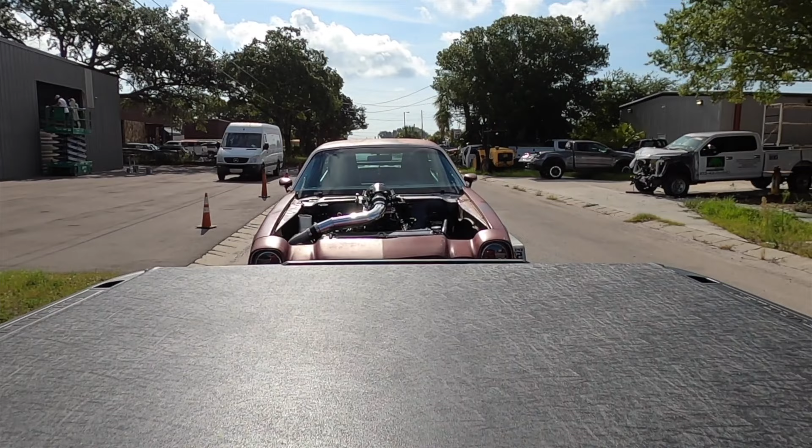Alright guys, got the Camaro back on the dyno, getting it cooled down now. Intercooler is nice and cooled, and got the dyno already calibrated. So we're gonna go by gear ratio for speed. Be ready for a rip here in a second.

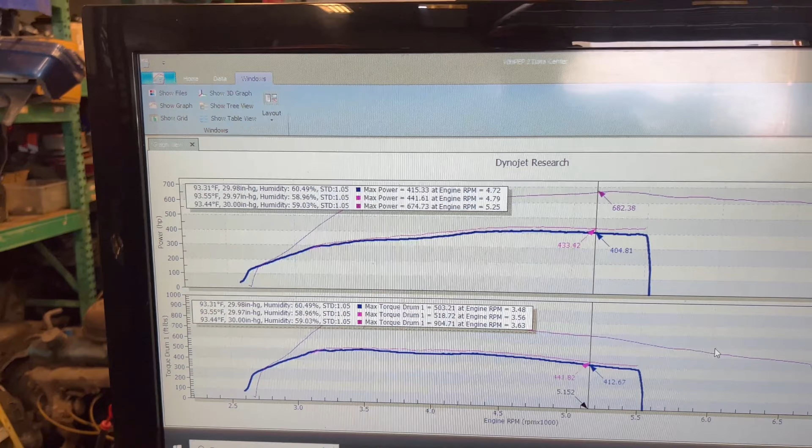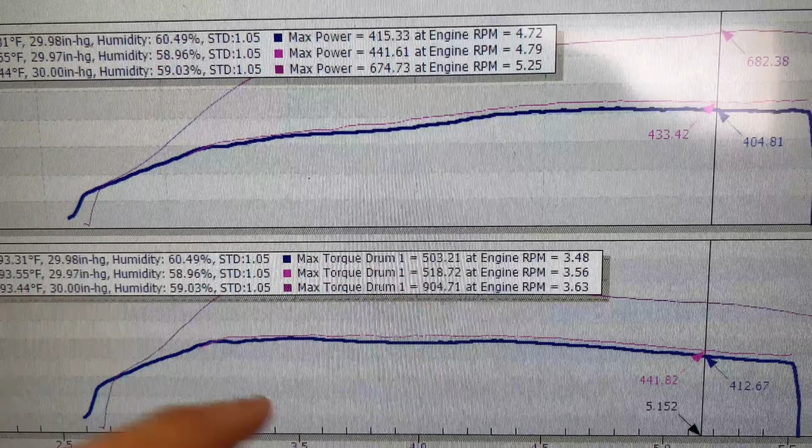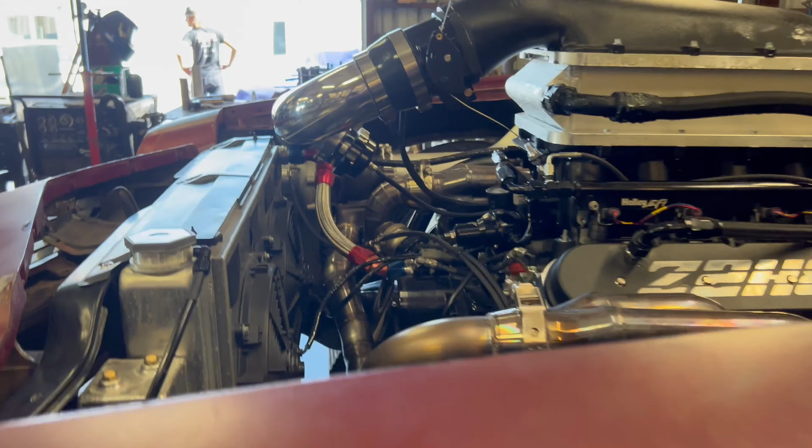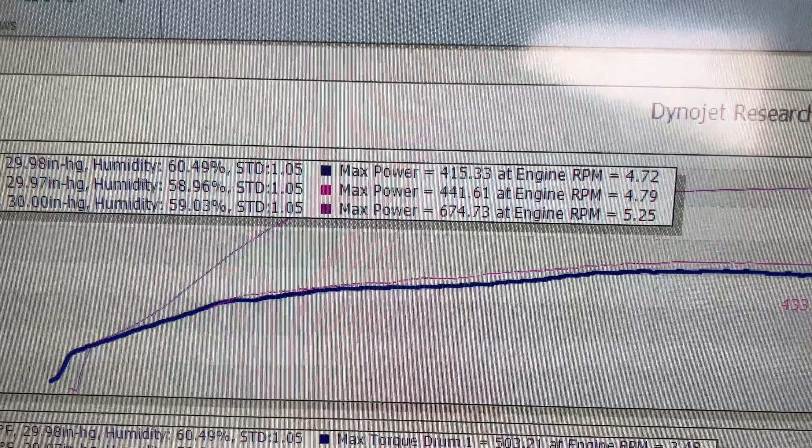Say the bottle's not on. Whoops, we gotta turn the boost controller on. Alright, so 904 torque number is probably not accurate since it kind of flashed the converter. 5,600 RPM, boost controller was on, so it made 13 pounds. So gonna ice it down again, make sure everything's good. They say it's gonna pull some fuel out of it, so looks like we're right on par with where we were at. We're 20 numbers off on the power, but we're also half a pound off the boost too. Small things, but good verification run, and we'll go from there.

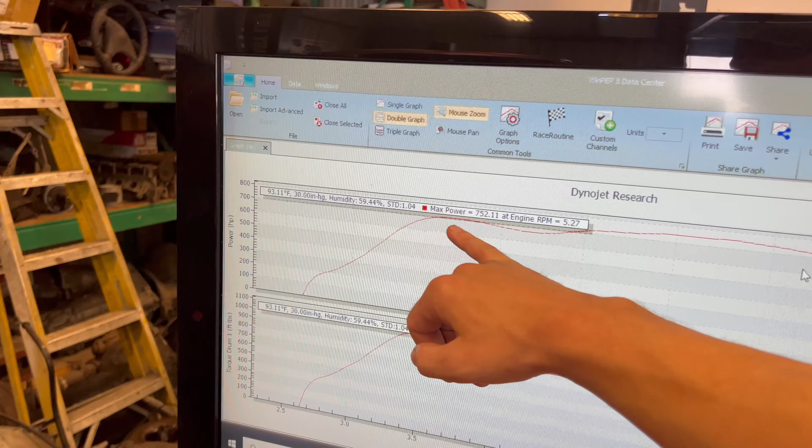What was that, 19? Alright, 19 pounds, 752, that's not right. It had a spike in the boost, that's why it came up so hard real quick, and then it had to settle down. It came in so hard. Right here, you think? Turbo lights, well, it's small, so yeah, I would hope it does. So that was 19 pounds, made 752. I mean, that's pretty on par, isn't it? That's not like terrible numbers at all.

Power glide, yeah, 9-inch. Yep, stock bottom end 5.3. Remember guys, this is a stock bottom end 5.3, just with some pistons, Gen 4 rods, a little turbo, big intercooler, big injectors, and good fuel.

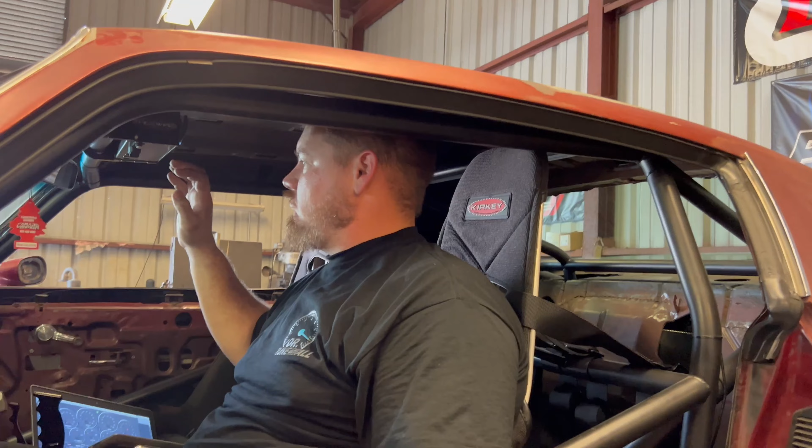What was that? So what'd you add to the dome for that? That was 3 more pounds, so we're getting to that range where I'm going to have to start adding more. So that last one, where we made 20 pounds, that was 18 on the dome. That was 21 on the dome, and it made 21. So we're going to have to start adding a little bit more.

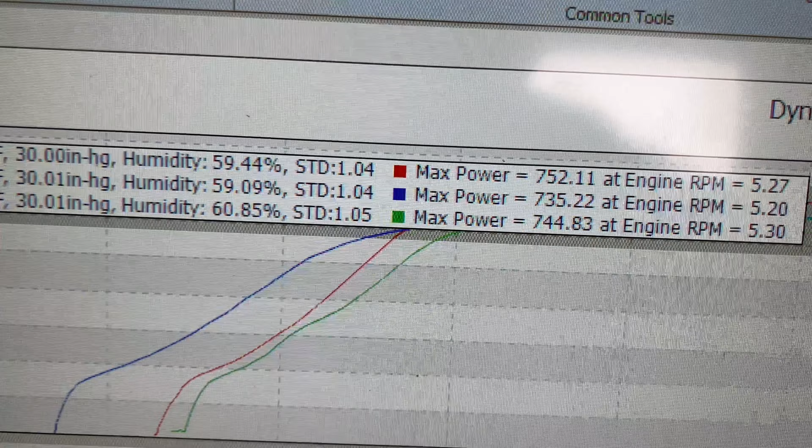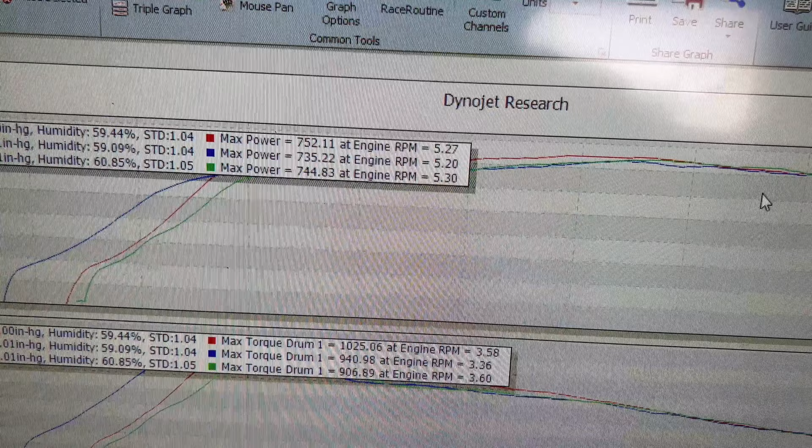From like 6,200 to 7,200 is 21 pounds. Okay, so yeah, 21 pounds, 744 horsepower. We did go down a little bit because there wasn't so much of a boost spike, so we kind of ramped it in nice and soft. It is revving out to 7,100. The dyno graph is showing a little bit off, not a big deal. But yeah, our torque number's still inaccurate. And yeah, so we're doing good. We're kind of meeting our limiting factor of the little VS Racing turbo, so we kind of knew it was going to happen. Not a big deal, but there's always room for improvements, and that's why we wanted to do that.

I saw a little fireball out of the wastegate.

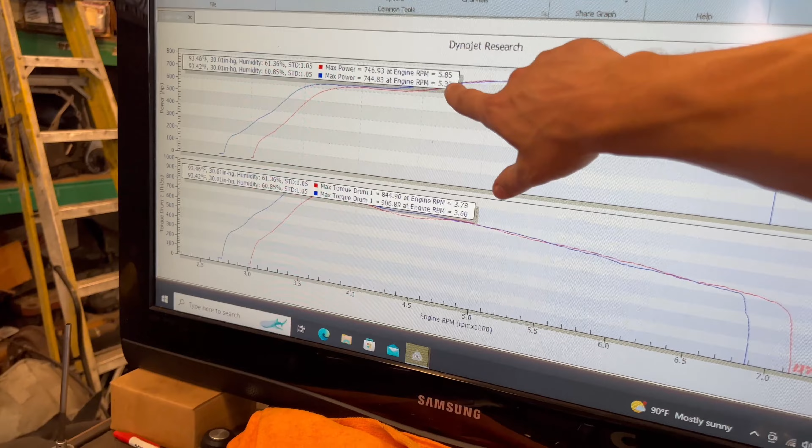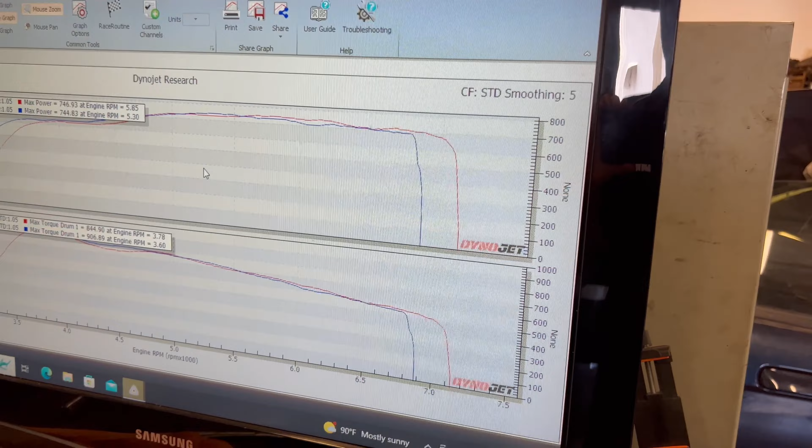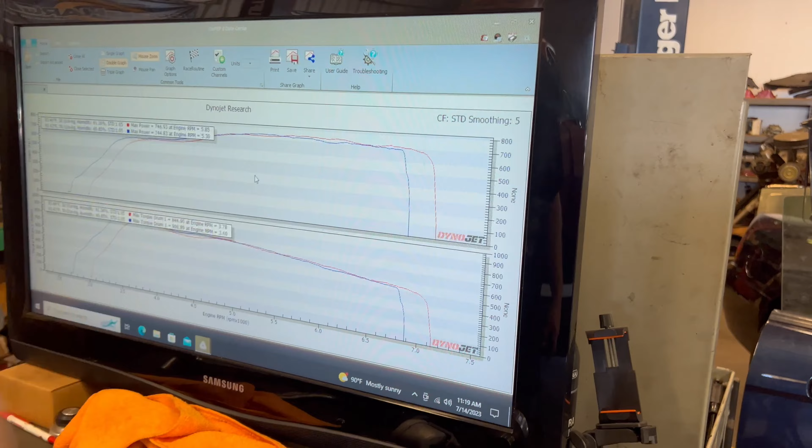Okay, so we went up 550 RPM for peak power. I don't like it, that wasn't accurate. It's a lot hotter too, but still, that was it, it carried. It didn't make more peak because I'm stretching the curve out, but it's also higher pretty much everywhere else, it carries a little better. It's stretched out. We didn't see 23 pounds until out in this area here, probably right here I would imagine. So it made 23 pounds, still made 744, or sorry, 746 horsepower, but still really good numbers for what we're doing.

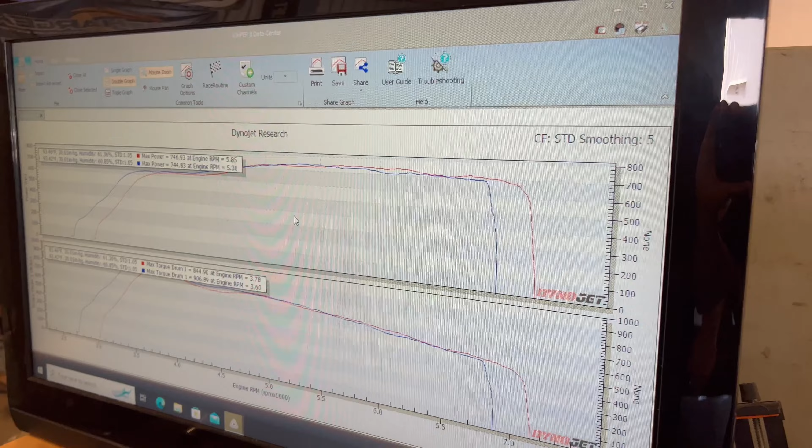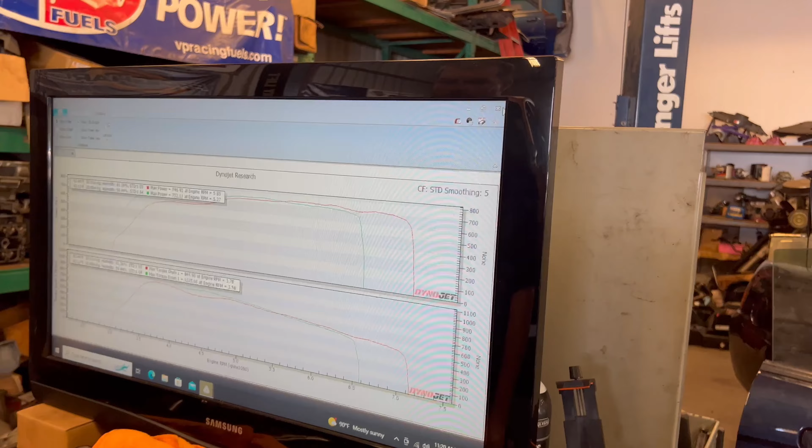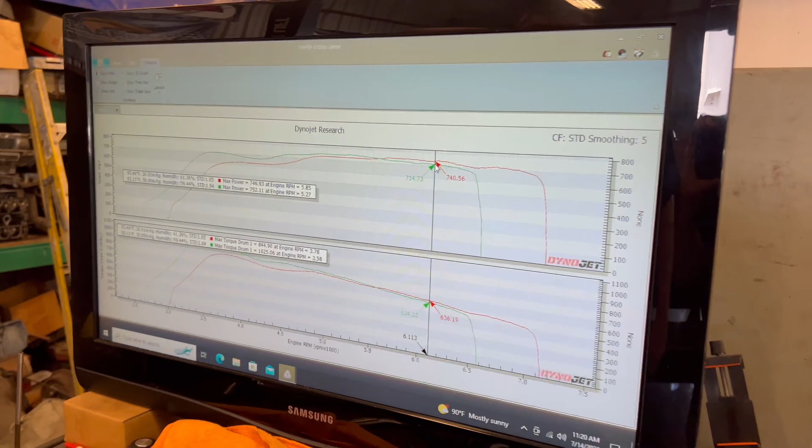Let's go back to the other one, 750. We pretty much hit peak power on the second or third pull, and then all we did was clean it up a lot. That's just because of how it came in and loaded. So you see the difference there, that's 25 or 26 horsepower. So all we're doing is fine tuning it, making it run better, longer, and out farther.

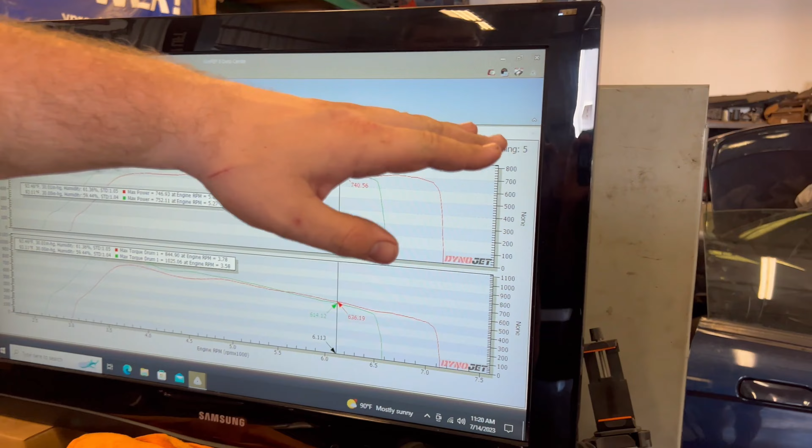Before I was having the boost come in real early on the dyno. Now I just kind of simmered it so it wasn't all coming in at one time. And it's still not accurate, this was actually close to 7,500, we're dealing with converter slip and all that stuff.

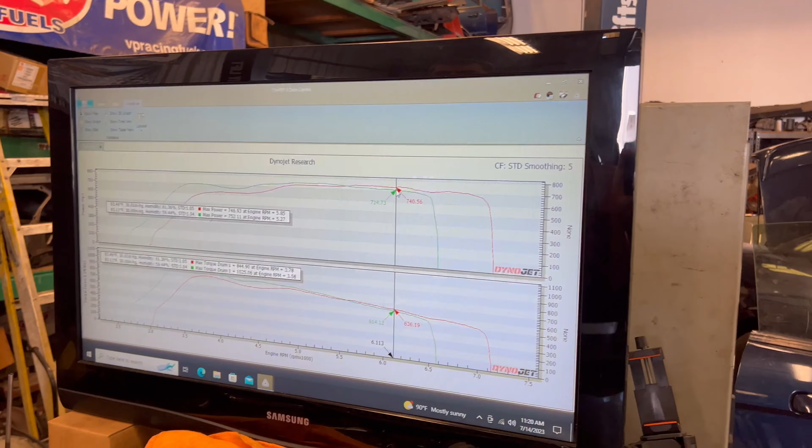Yeah, so it's good for the track now though. That's why I don't get caught up on the number, it's just a tool, it's just a number, that's all it is. Don't matter, all the fueling, everything looks good. We'll pull a couple spark plugs and just check the timing mark, okay, and see where we're at. All right, let's do it.

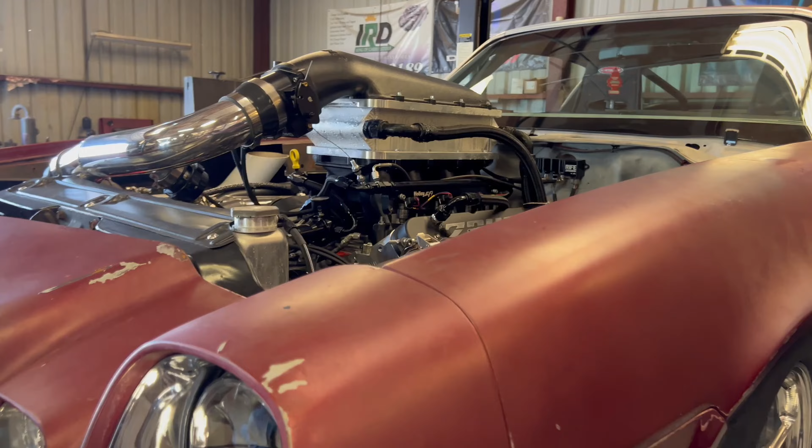You gotta simmer the boost down a lot.

Hi guys, so I got the Camaro all packed away, trailer's gone, truck's still here, I'll show you that in a minute. But we made about 150 less horsepower than I thought, I thought we were probably going to be touching 900. But like Nate explained to me, it's not about the number, it's really about how the car reacts and how the car performs, which is 100% correct, right?

The dyno is just a tool to get us to the track. Do we really have to dyno the car? No, we really don't, but it helps us find issues before we go all the way to Bradenton and do all that stuff just to drive back because we have a coolant pressure leak or a problem, which is already gone. So we saw a peak of 19 pounds, at the top boost we were seeing was 23 pounds. We only had 19 pounds of coolant pressure and then it leveled off, so very pleased with that, very glad that that is fixed finally. The car did phenomenally, couldn't be more proud of what I've done, what my brother's done, what we've accomplished and made of this car.

So like I was saying earlier, the Corvette is gone. Tahoe's still here, that's never going away. Camaro behind me, never going away. The Ranger, meh, it might go, it might stay, I don't know yet. But this is the Corvette's replacement. This is a 2019 Silverado 1500, 6.2 liter, 10-speed automatic high country.